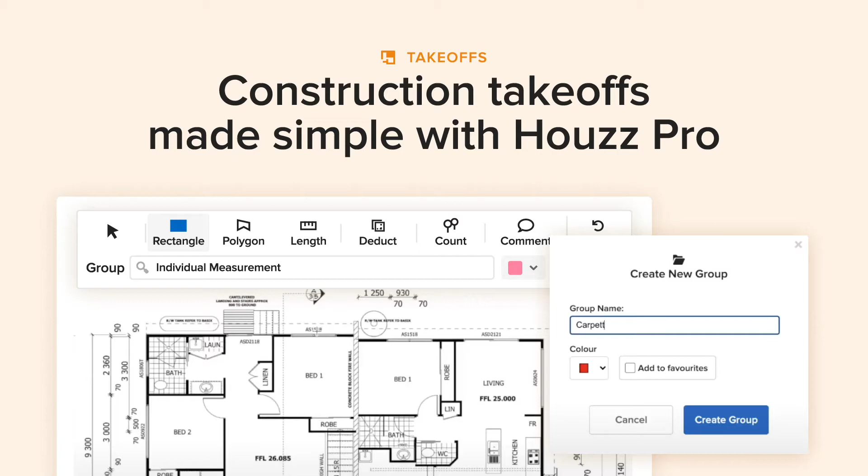In this short demo, we're going to run through all the tools in the Houzz Pro Takeoff and show you how to complete a material takeoff and submit a professional estimate.

At the top of the canvas, if you've uploaded multiple PDFs, you'll be able to scroll through them on the side view and select pages from within the PDF. By clicking the three buttons on the side, you'll get the option to rotate, rename, clone, and delete pages.

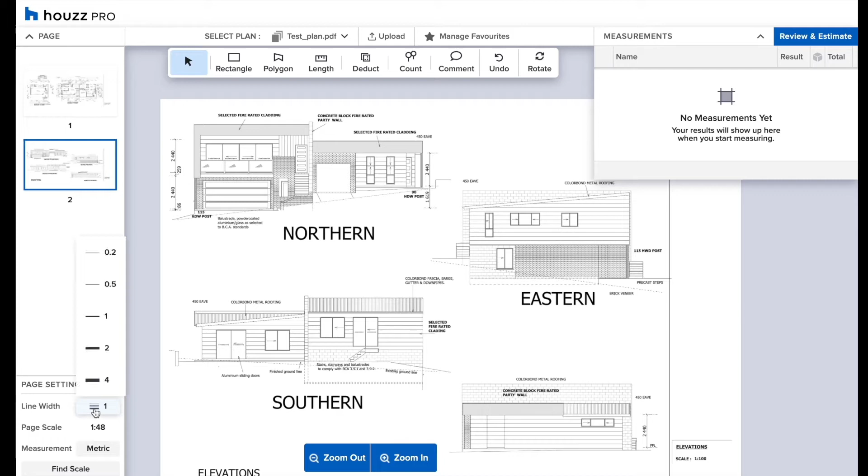At the bottom of the Settings tab, you'll be able to choose your line width to make it more apparent on the canvas or on the marked up PDFs. To zoom in and zoom out, use the buttons at the bottom of the canvas.

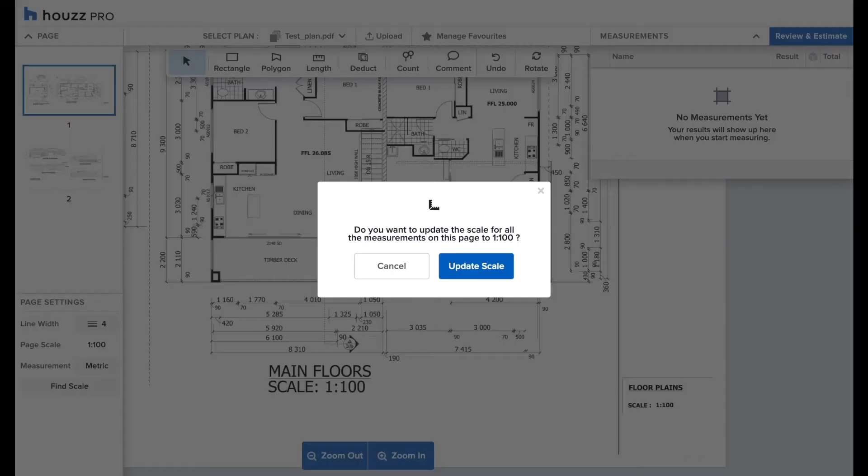Houzz Pro will automatically read the page size which you're measuring on. What you need to do is set the correct scale here. By setting this scale, you'll calibrate the plans and you'll be able to measure appropriately.

If you're looking for a bit more room on the canvas when you're measuring, you can collapse the measurements drawer and the page view finder on the top right and top left, respectively.

Now that the settings are out of the way, we can begin measuring. The best practice is to familiarize yourself with the project on which you're being asked to quote. You can set up the groups ahead of time.

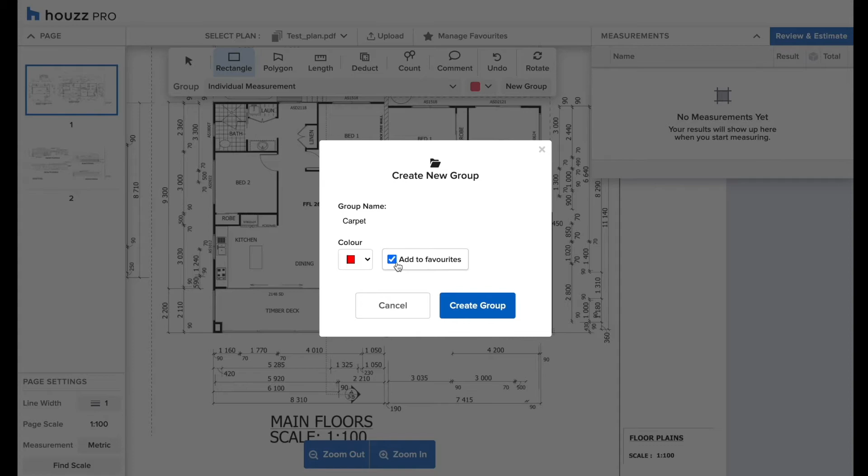If this group is something you measure all the time, you can save it to your favorites. This will add it to your account, and it will be available for you anytime you upload a project to Houzz. The Rectangle tool will allow you to get the area of any shape.

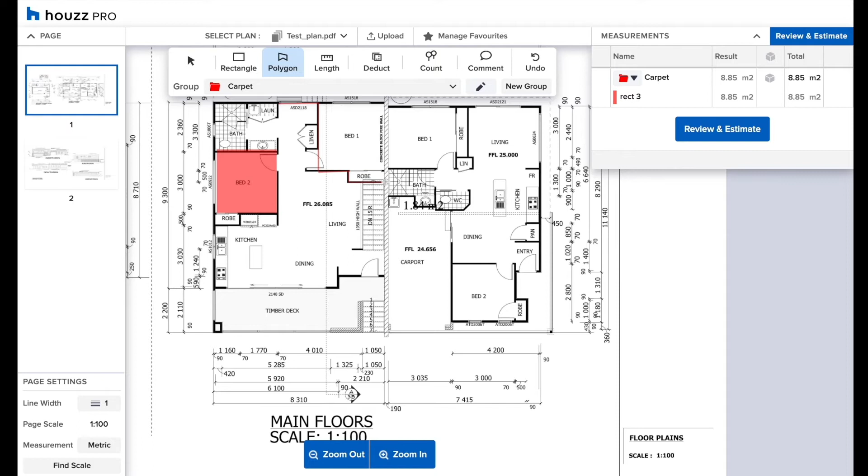Simply click, drag, and drop. The Polygon will also allow you to get the area. Simply click to start, click to drop a marker, and change direction. Once you're finished, double-click and it will complete the measurement, giving you the area of a non-symmetrical shape.

The Length tool works the same as the Polygon. Click to start, click to drop a marker and change direction, and double-click to finish.

As you can see, if you have a group selected, the shapes will continuously add into that folder and give you the sum total of that group.

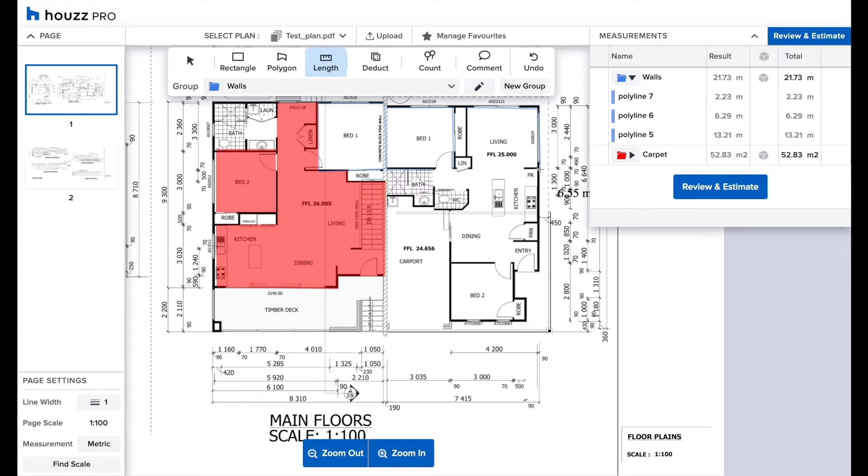The Count function allows you to count anything you want: GPOs, doors, vanity items, whatever you need. Simply click a point on the plan where you wish to drop the marker, and it will represent on the canvas as well as showing up in the measurements drawer.

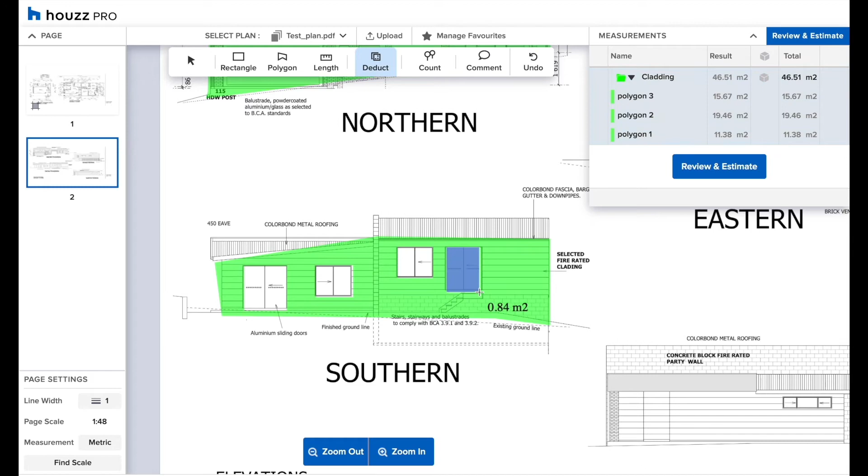Next, we're going to run through the Deductions tool. This will take the area out of any existing area. It works like the Rectangle tool. Simply click, drag and drop, and you'll see that the area comes out. This can be handy for taking out windows and doors from your cladding.

Another great feature on the Houzz Pro Takeoff tool is adding dimensions to existing measurements. By checking the box in the measurement drawer, you can add in a height, width, depth, or pitch. In this example, we're going to add 2.7 meters to the walls to get your total square meterage.

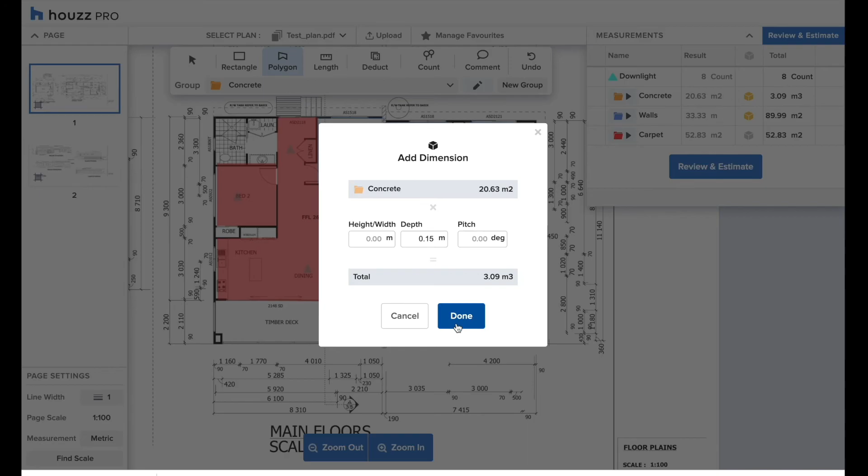You can also add in a depth to concrete. Again, 0.15 will be 150 mil, and that will give you your volume of concrete that you need to order for the job. To avoid doubling up on work, you can duplicate any measurement you've made on the canvas.

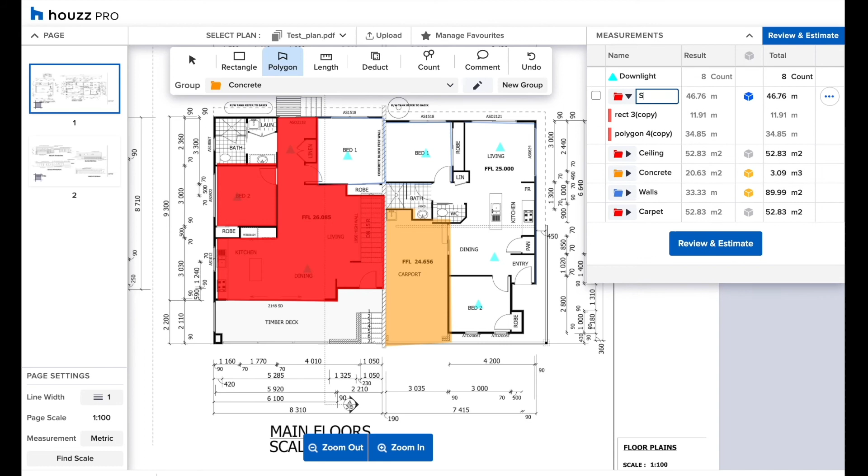In this example, we're duplicating carpet, which will then be the square meterage of your ceiling. You can also get the perimeter of any area. Check the box and select Perimeter at the bottom of the measurements drawer. Again, you get the perimeter of your carpet. Now you've got your skirting measurements.

At the top of the canvas, above the toolbar, you can manage your favorites. Here you can rename them, give them different colors, and give them a unit price. By doing this, you'll be able to auto-generate estimates when you've finished your takeoffs.

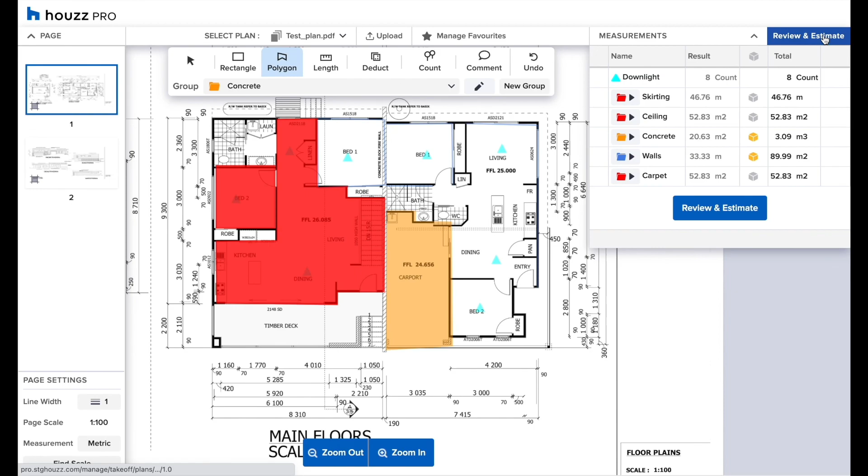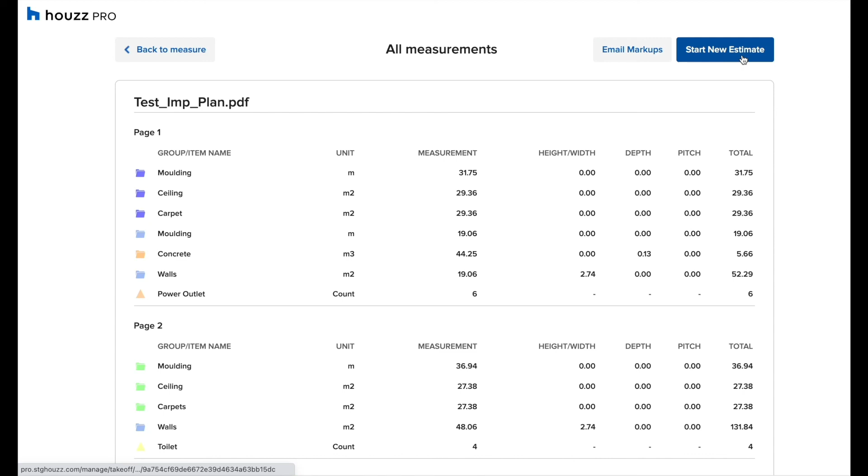When you're happy you've completed your material takeoff, you can hit Review and Estimate. Here you'll have all of your measurements you've made on the Houzz Pro canvas. You can download the markups or begin a new estimate.